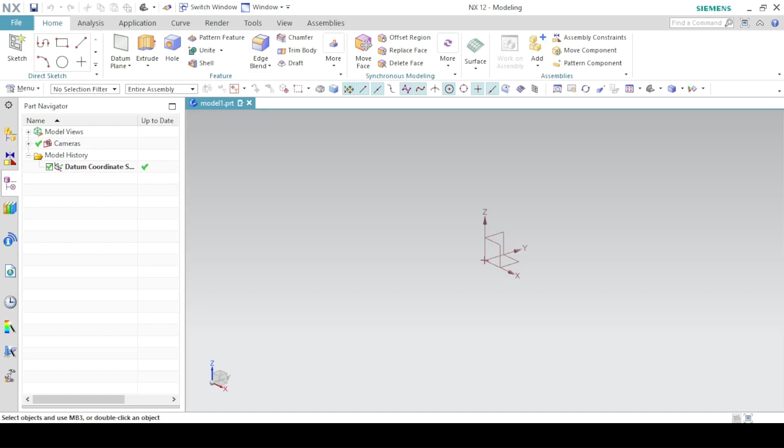So we first start with a smaller cylinder. It has a diameter of 20 millimeters and it is extruded down by a distance of 24 millimeters. Click on the extrude feature, come to sketch section, and we are going to use the XZ plane to get the sketch. So we draw a circle of diameter 20 millimeters, click on finish. Now extrude in this direction by a distance of 24 millimeters and click on apply.

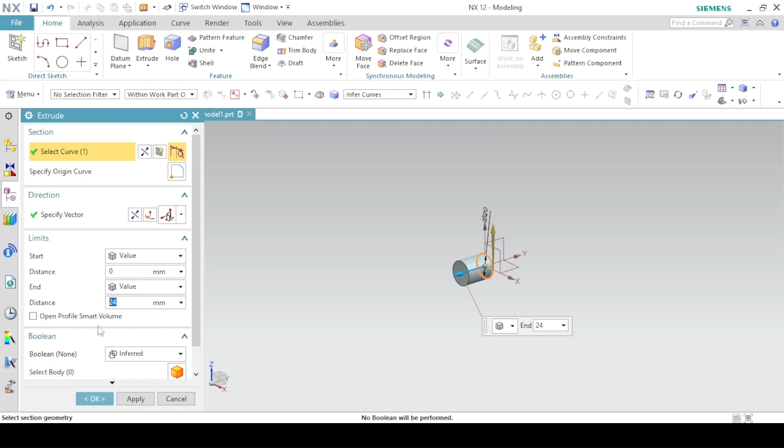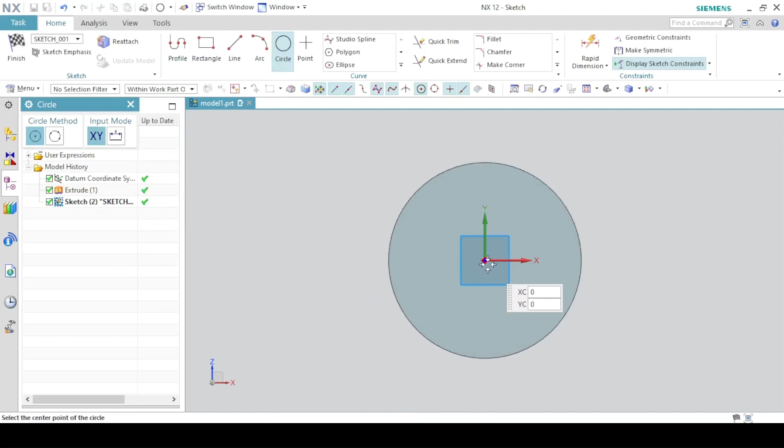Next, we draw the second cylinder and it will have a diameter of the 20 plus this 4 plus another 4 here, which will be 28. So again, click on sketch section, click on this face, and then draw a circle of diameter 28 millimeters. And then we'll extrude downwards again by a distance of 24. Make sure the boolean is set to unite. Click on apply.

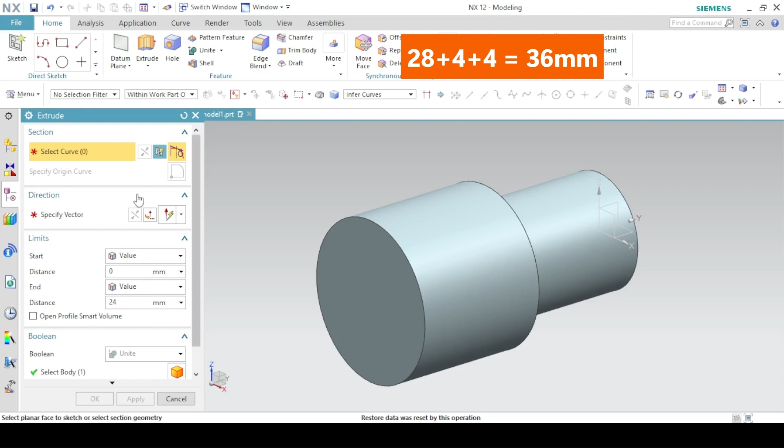Now we'll do the same for the third cylinder. This time it will have a diameter of the 28 plus the 4 plus another 4, which will be 36 millimeters. So we draw a circle of diameter 36 and click on finish. Again, we'll extrude downwards by another 24 millimeters. With the boolean set to unite, click on apply.

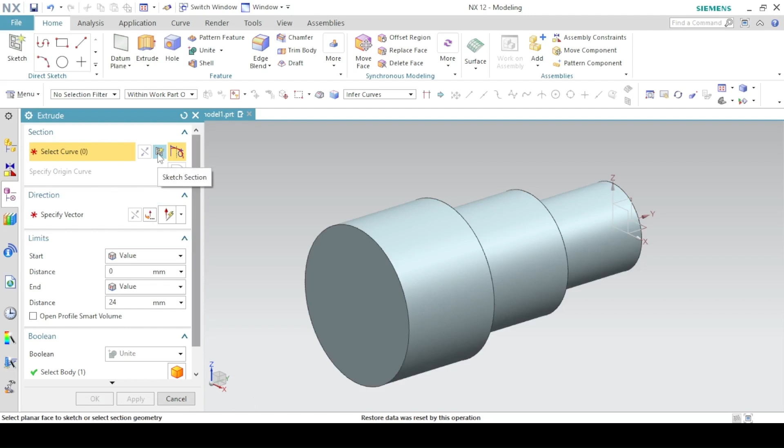Now let's cut out this slot from it. We're going to be using the extrude feature again. So click on sketch section, and make the sketch on the YZ plane, which is over here. Click on it and click OK.

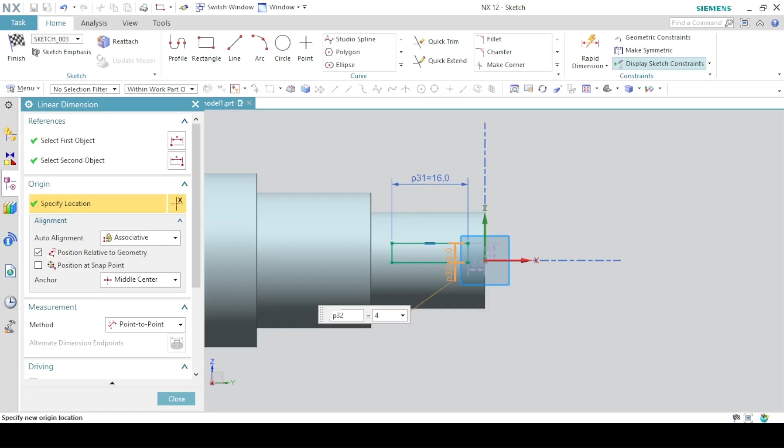Then we draw a rectangle of dimension 16 by the radius of the circles at the tip of the rectangle, which is 2, so the diameter will be 4. The rectangle should have a dimension of 16 millimeters by 4 millimeters. Then we make sure that the centers of the circle here align with the center of the cylinder. So you come to this center here, click on it, and come to the sketch origin, click on it.

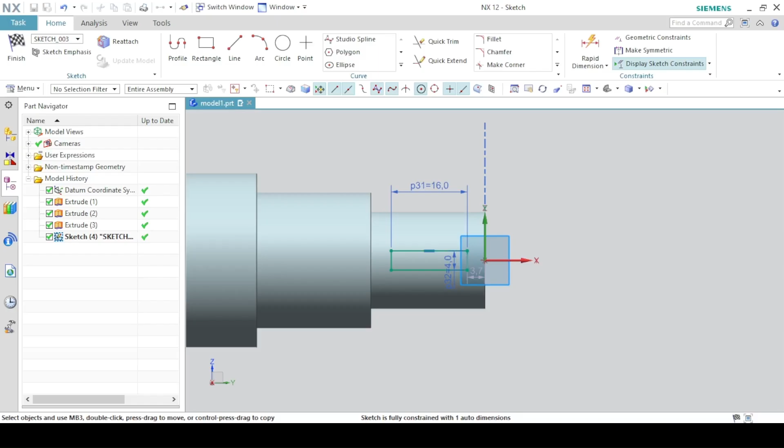And give it a horizontal alignment. Also, this rectangle is centrally placed inside the cylinder here, so the centers of both the rectangle and the cylinder over this side here are aligned, or they lie in the same line. The whole distance of the cylinder here is 24 millimeters, so half of it, that is from this tip here to the midpoint of the cylinder, should be 24 divided by 2, which is 12. So the distance from this center to the tip here should also be 12. For the linear dimension, come to the center, locate it and click on it, the midpoint of the line, and click on this line also, and change it to 12 millimeters.

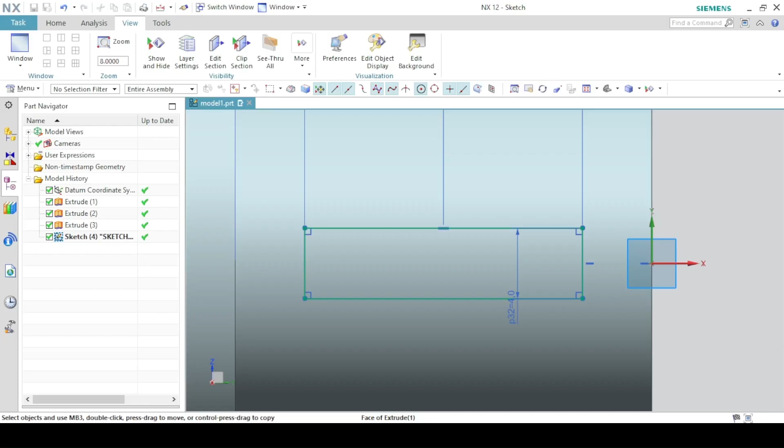Next, you have to zoom in a bit. So we zoom in and then we add fillets to round the edges. The fillets will have a radius of 2, so we locate the fillet tool with a radius of 2 millimeters. Click on all the vertices so we can have the rounded edges or the rounded corners.

Then we use a quick trim tool to trim the unwanted parts from it. Click on finish. Now we must note that the plane on which we made the sketch is in the center of the cylinder over here. So we start the extrusion at an offset distance of, now the diameter of the cylinder is 20 millimeters, so the distance from the center of the cylinder to the edge of the cylinder here is 20 divided by 2, which is 10. So we start the extrusion at an offset distance of 10 millimeters.

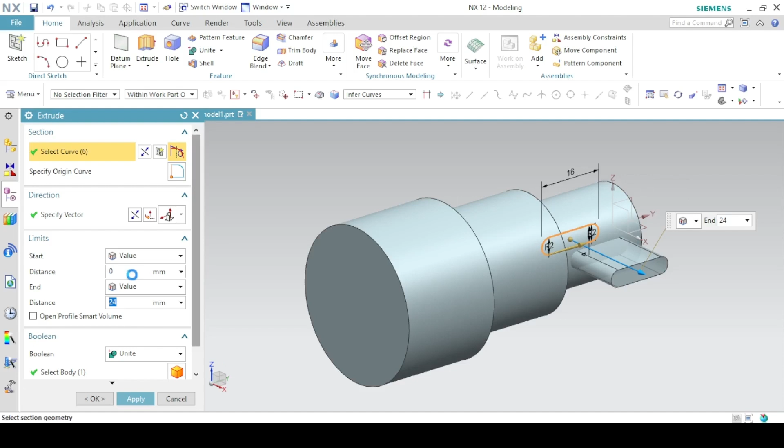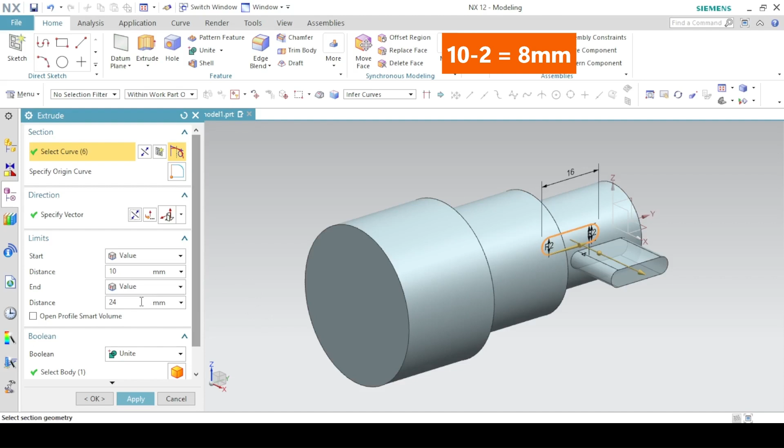Then we end the extrusion at a distance of, the whole extrusion itself is 2 millimeters. So the distance from the center of the cylinder to the tip where we have the 2 millimeters starting should be the 10 millimeters minus the 2 millimeters, which gives us 8 millimeters. So we end the extrusion at a distance of 8 millimeters, make sure the boolean is set to subtract, and click on OK.

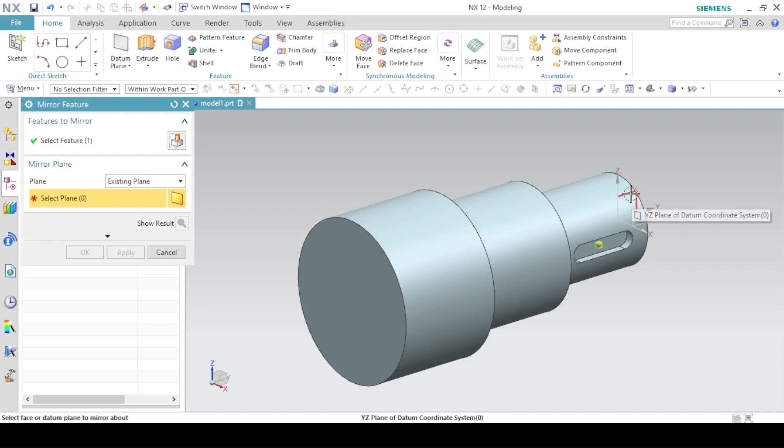Now I want to have this same slot on the other side too. So the best thing we can do is mirror. Locate the mirror feature and click on this feature here. Come to select plane and mirror with the mid plane being the YZ plane. Click on the YZ plane and click OK. When you rotate the drawing, we can see we have the same feature here also.

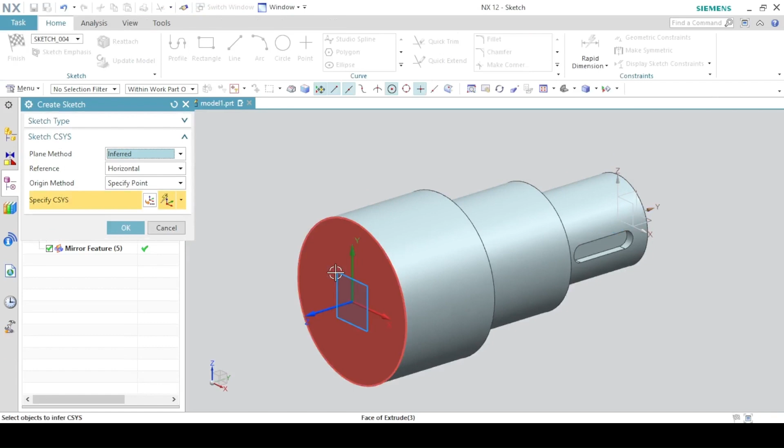Next, we'll cut out this part also from it. We're going to cut out from this side here. Click on extrude, come to sketch section, click on this face and click OK. We want to create 2 vertical lines on this face here.

Then click on the lines and give them a vertical constraint so they can be actual vertical lines. Now the distance separating these 2 vertical lines is the same distance here, which is 20 plus 4 plus 4, which is 28.

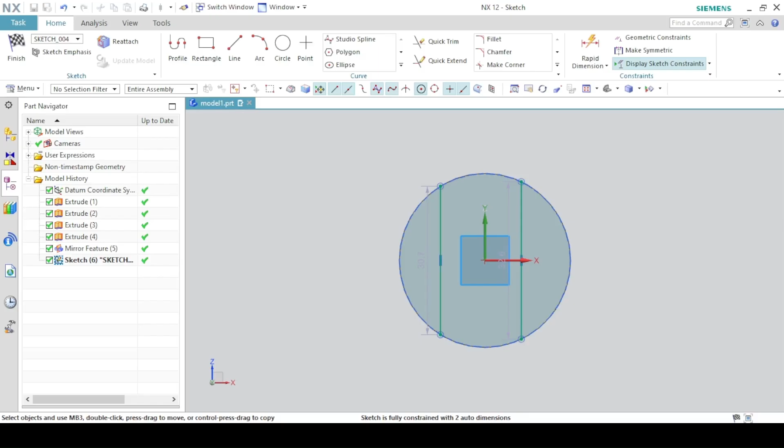And then make sure half the distance is 14, so there can be equal distances between the 2 lines and the center. Then we use the arc tool to finish up the semicircle, and click on finish.

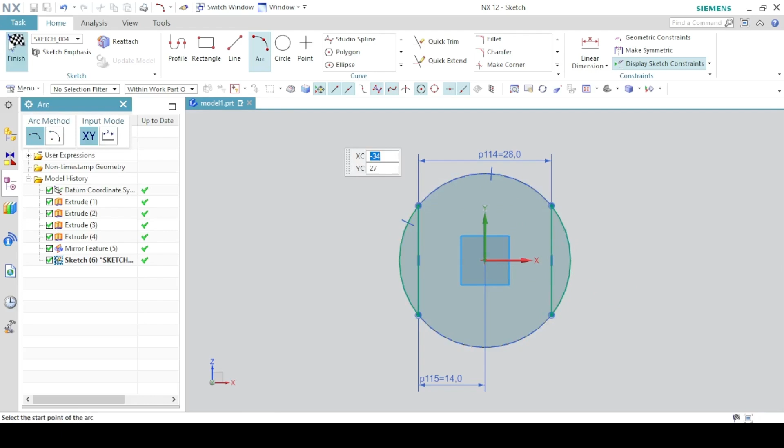So reverse the direction of the cut, and we start the extrusion distance at the very place where we made the sketch. Then extrude inside by 24 minus 4 millimeters, which will be 20 millimeters. Make sure the boolean is set to subtract and click on OK.

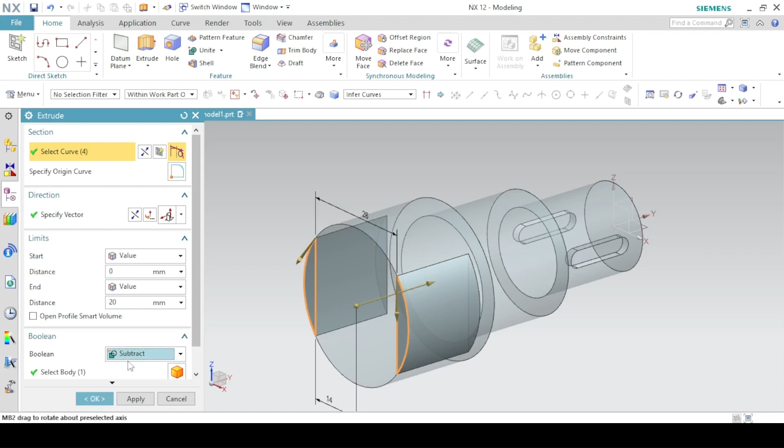Next, we'll add these 2 holes to it. The first hole will be at the center of this cylinder here and it'll cut through to the end. Click on the hole feature, come to sketch section and click on this face, click OK. We locate the hole at the direct center here of the arc and click on finish.

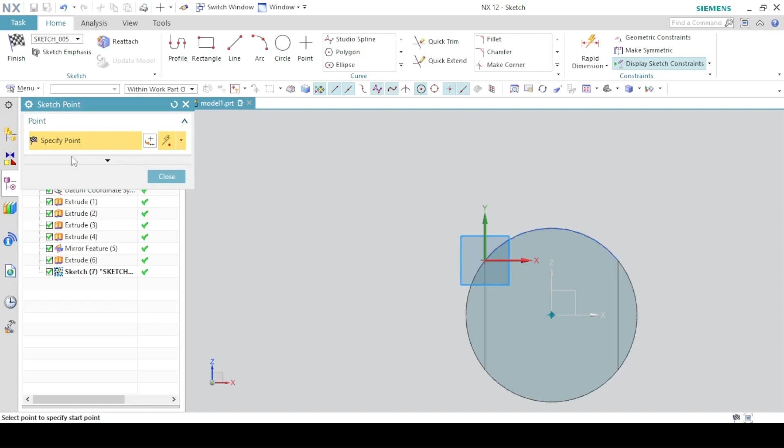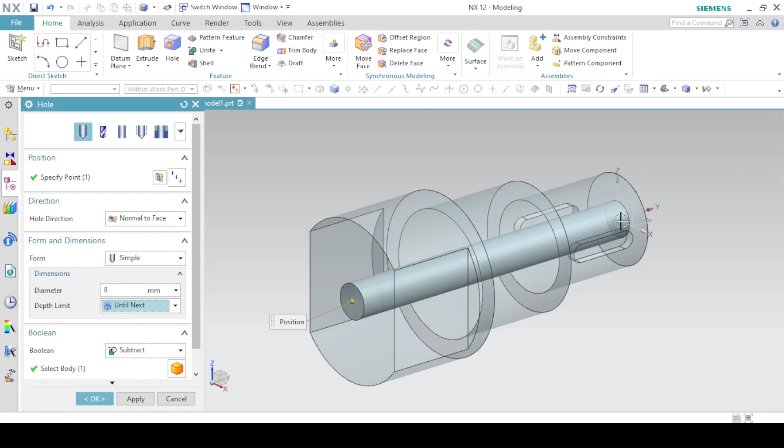Now the hole diameter will be 8 millimeters, which is here, and the depth limit will be until next. Because we set the Boolean attribute between these 3 cylinders as unite, they all behave as one part, so the hole starts from the edge here to the very end of the last cylinder over here. Click on apply.

That will make the second hole be in this center here, which will be the center of this rectangle. So click on sketch section again with the hole feature, click on this face and click OK. Then we make a point over here.

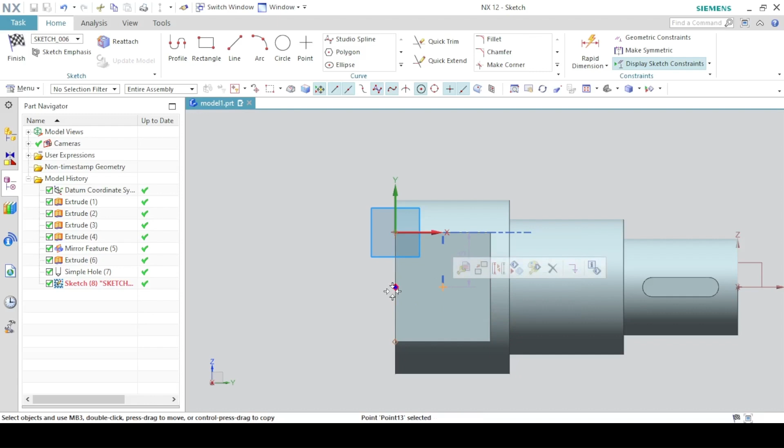We have to position it at the direct center of the rectangle. Click on the hole center, locate the center of this line here and give them a vertical alignment. We do the same for this side, this time with a horizontal alignment. Click on finish.

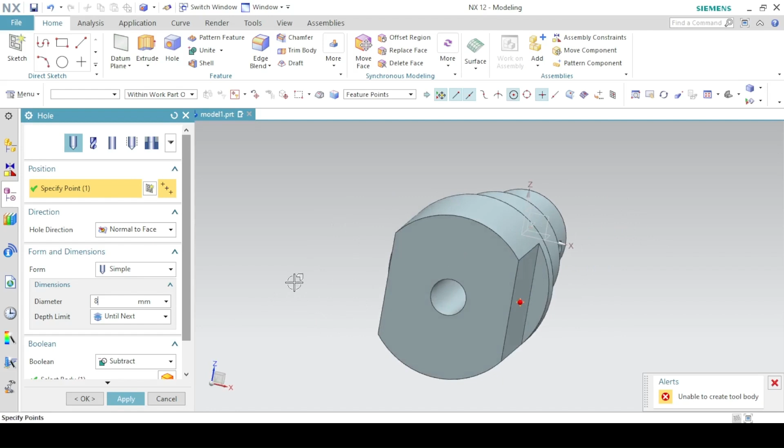Now again, the hole diameter will be 8 and it will go through to the end point over here, so the diameter is set to 8. Now for the depth limit, we have another hole here interfering the path of the second hole, so we set the depth limit to until selected and then click on this face here. Click apply.

And the last thing we'll do is add an edge blend or a fillet of radius 2. Locate the edge blend feature with the radius set to 2, click on this edge and click OK.

So yeah, that's how to model this part from scratch using Siemens NX 12.